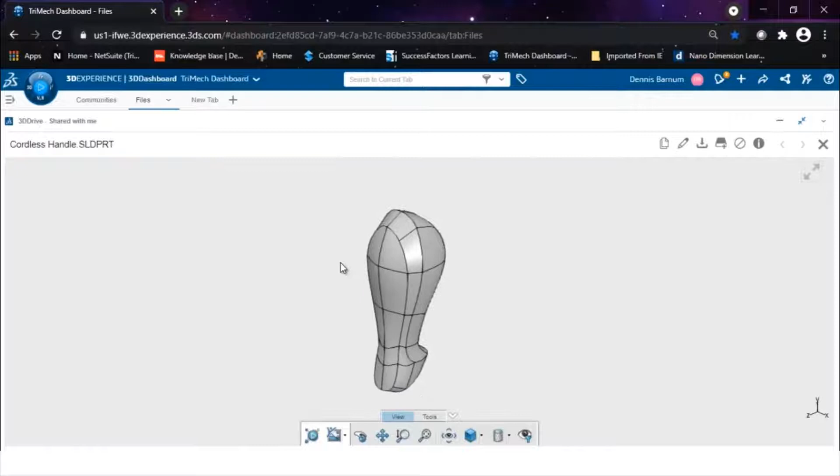Now, I will head over to the Files tab, and once it loads, we will be able to get a full view of our cordless handle model, and we can view our part in 3D space directly in the browser. And we also have some tools to manipulate and measure the part. The next step is to download the part from the 3DEXPERIENCE platform and open the file with SolidWorks on our desktop.

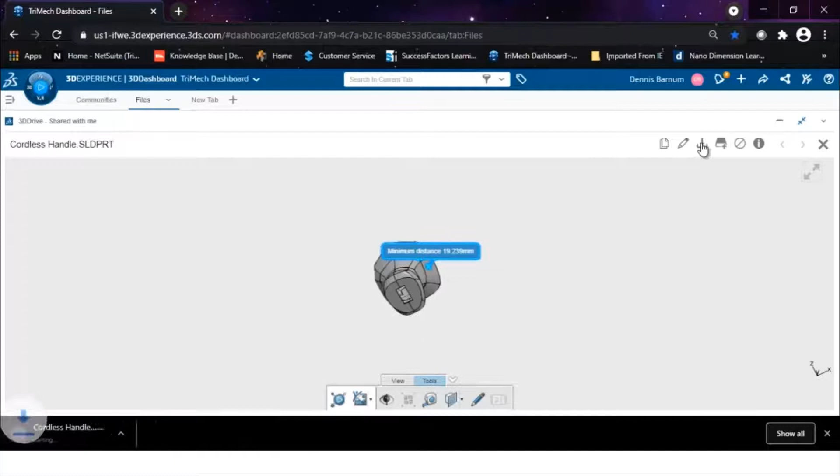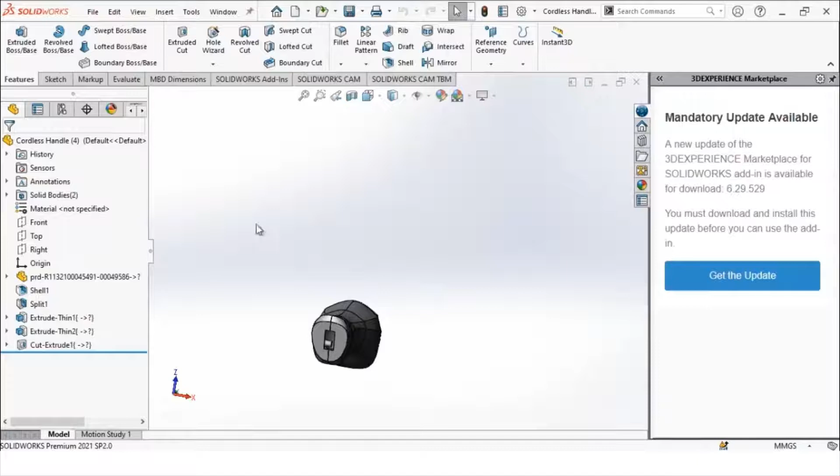Now that the part is open in SolidWorks, if we section view it, we can see that this is a hollow body. This means that the part will fill up with support material if we were to print this as a whole. To avoid that, we will split the part into two pieces and print each half individually. This way, we will save on support material, making the prototype a little bit more inexpensive. I'll go ahead and create a sketch and cut this, making sure that we use the half that we want. And once complete, I'm going to go ahead and save this as a solid part file.

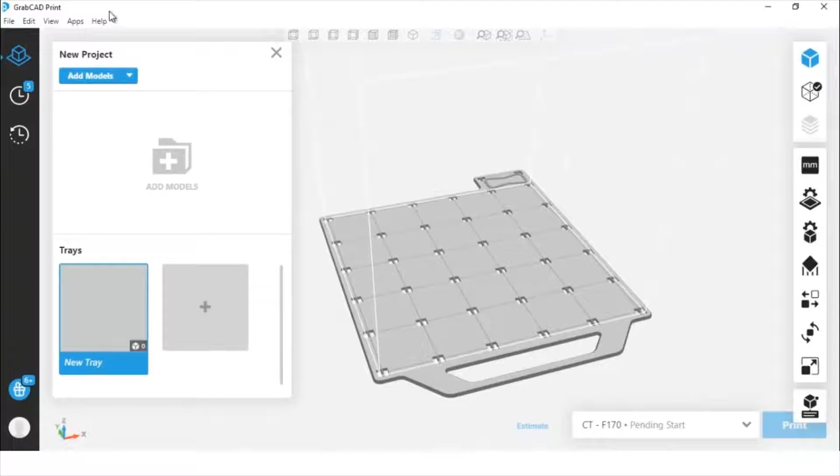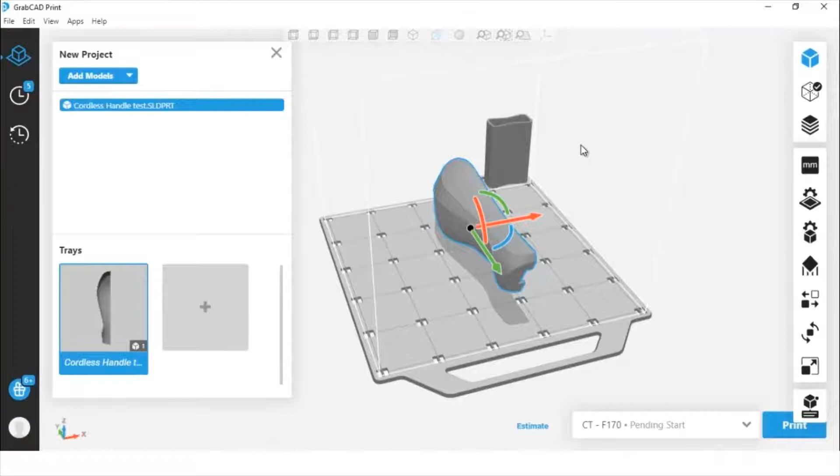Once that's saved, we can open GrabCAD Print, which is the slicing software that is free to download from GrabCAD.com, and import the solid part file from SolidWorks directly into the GrabCAD Print window. What's really nice about GrabCAD Print is that it's capable of accepting native CAD files, OBJs, STLs, IGES, and 3MF files. GrabCAD Print has a lot of flexibility and range to it, making it one of the most powerful print prep software tools on the market.

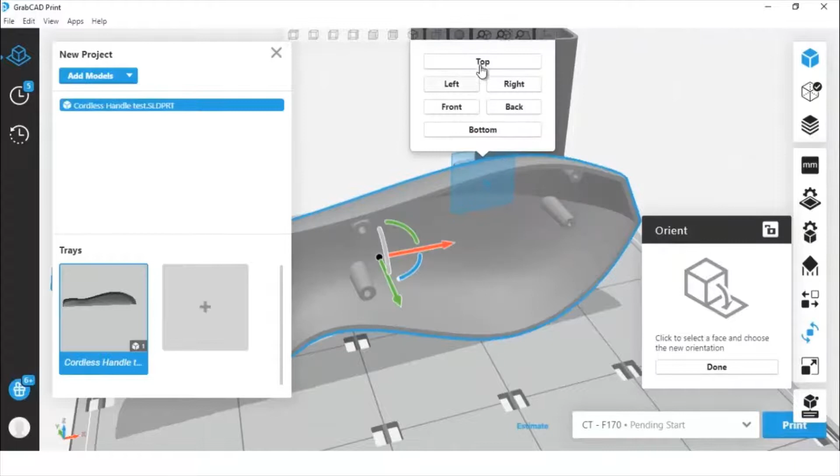So, as you can see here, we have an axis where we can rotate and flip our model manually. So we're going to orient our part using the Orient tool so we can orient face to plane, and we're going to make this the top. That way, like I mentioned before, we don't fill the model with support, as if we printed it the other way. From there, we can move this back a little for proper placement on the build tray.

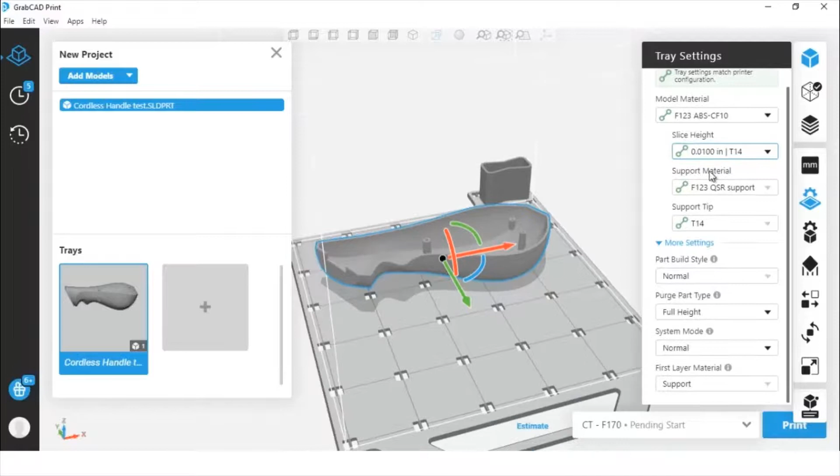Now, when we select the model, we can change different parameters such as our slice height. Here we will go to 0.010 of an inch, and we will be using the new F123 ABS CF10 available on this printer. Once that step is done, we are going to close this panel and open model settings to take a look at those settings. Here we can change the infill density if we wanted to reduce the weight of the part. In other words, we can select a sparse infill density where we would like to use less material, but for this geometry, we're going to select solid density, which is the default setting.

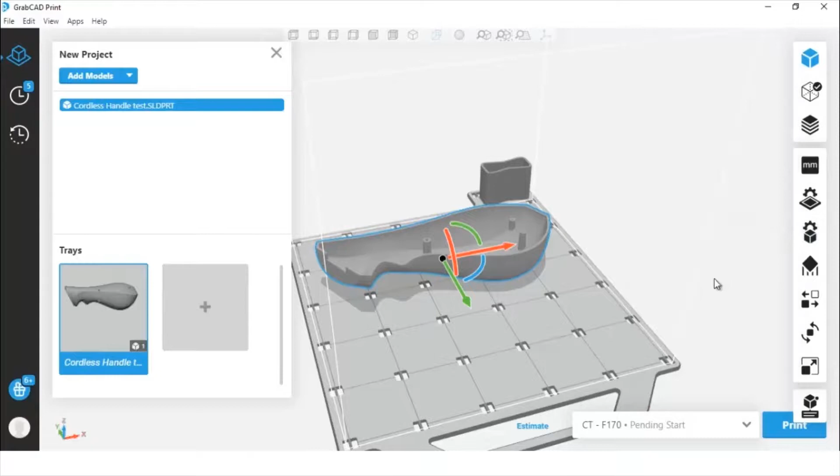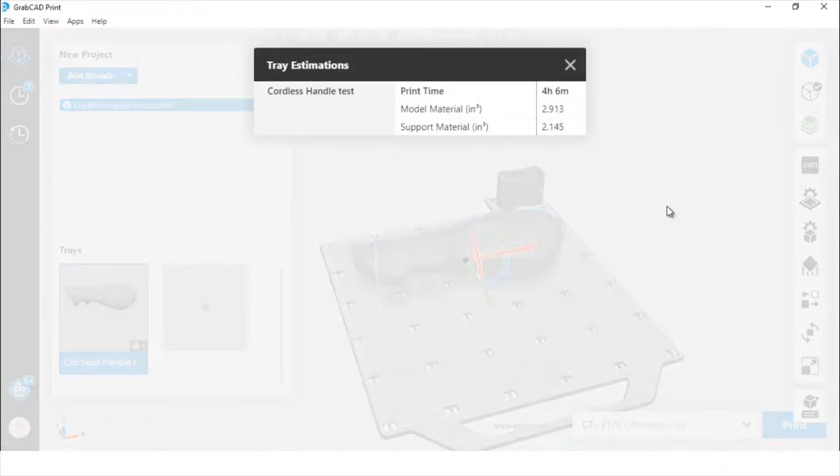Once these parameters are set, we can click on Estimate. What this does is this slices the part into individual layers and provides an estimate on how long it's going to take the printer to complete the job, as well as the model and support material usage. This will provide a better representation for how much the prototype will cost. Now that the estimation is complete, we can see that this is about a 4-hour and 6-minute build, and it will use about 3 cubic inches of model material and about 2 cubic inches of support material. So based on the cubic inch cost, we can calculate the total cost of this prototype.

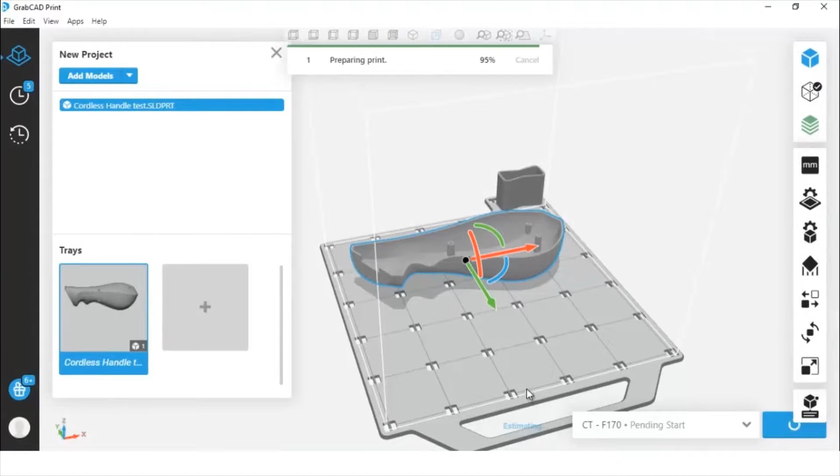Now that all the parameters are set, we can go ahead and click Print, and this will send the file over to the F170. This will queue the print job, and we can go to the printer and monitor the print.

So now that the prototype is complete, we are going to go back to Communities in the 3DEXPERIENCE platform and tell our team and share with them our success. We can create a new post and tell them that the prototype came out great. We will add some pictures that I took of the prototype for them to see what it looks like as well. And the last thing I'm going to do before I publish this post is simply tag my colleagues so they get notified and stay in constant communication about the project. So you can see how easy it is to go from the 3DEXPERIENCE platform, take the CAD file, import it into your local computer, 3D print the part, and share your results and your success with your team, all remotely.